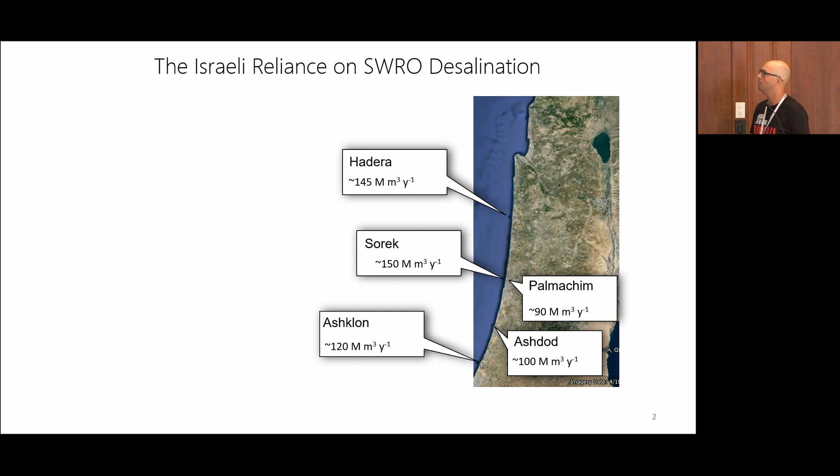I would say that facing water scarcity, Israel launched the construction of 5 large-scale desalination facilities about 20 years ago that today produce roughly 650 million cubic meters of fresh water per year. That corresponds roughly to 70% of what all Israelis are drinking. Now, we are in the midst of constructing another 2 large-scale desalination facilities, one in the middle of the country and one in the north, that in the short term will minimize our dependency on natural fresh water.

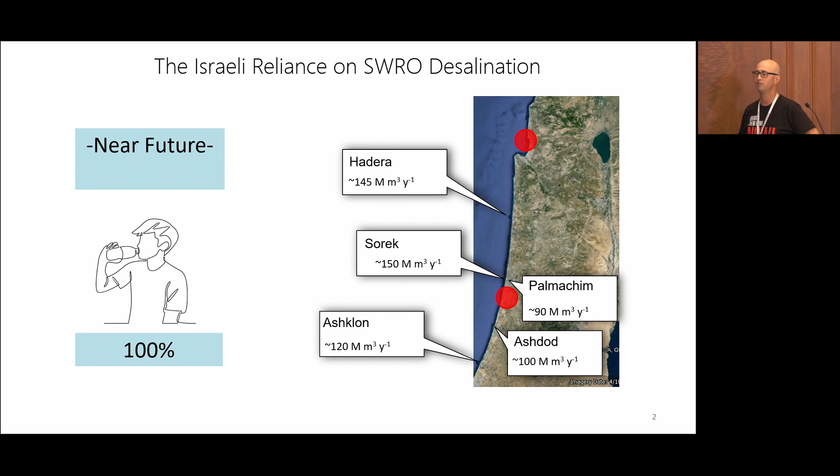Similarly, other countries like Israel have walked the path of this desalination process. However, what is unique and needs to be remembered is that Israel constructed these large-scale facilities over a fairly narrow strip of coastal environment. Now, the scheme of most of the desalination facilities in Israel is similar. You draw water directly from the coast. It is pre-treated and then desalinated, transported to our water carrier, and disseminated to the public after post-treatment.

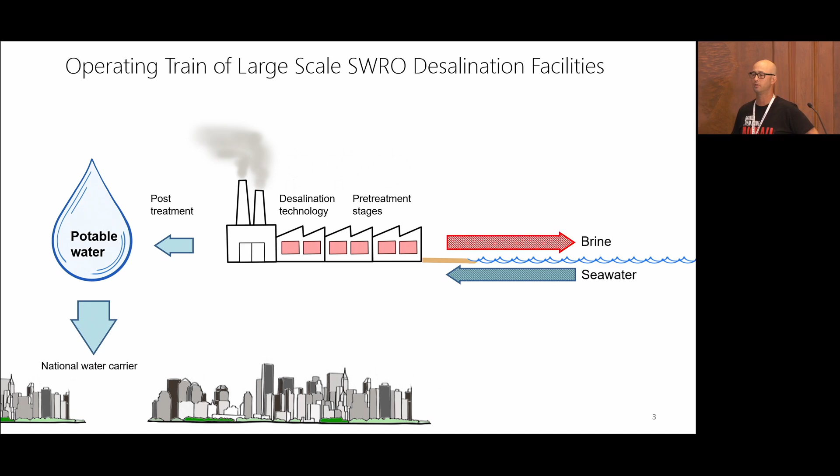However, one should remember that together with desalinating the water, hypersaline brine waste is also discharged back into the coastal environment. As such, this is the nexus that I will be discussing today. In a more poetic way, I would say I see this nexus as the strange case of Dr. Jekyll and Mr. Hyde. Desalination today is one of the most important things for humanity, especially during this era of climate change. However, desalination has a dark side that one should remember, and that's the nexus with the aquatic environment.

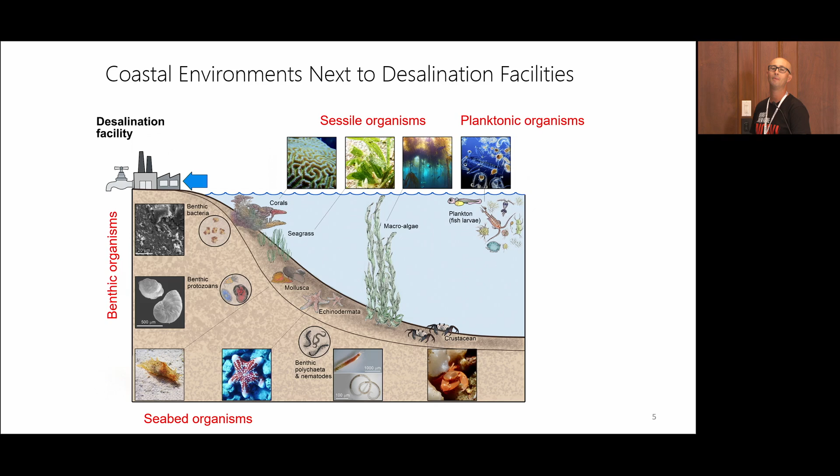Looking at the ocean, this is how I see it. I see planktonic organisms free-floating in the water column. There could be fish larvae, zooplankton, phytoplankton, bacteria, and others. You can also find large macroalgae like kelp, seagrass meadows, and coral reefs. You would also see a lot of organisms roaming the seabed, such as sea snails, sea stars, crustaceans, and many, many others. Under the sediment, you can also find a lot of nematodes and worms, protists, as well as benthic bacteria. All are doing a lot of remineralization and decomposition of organic matter. That's why they are at the basis of the food chain.

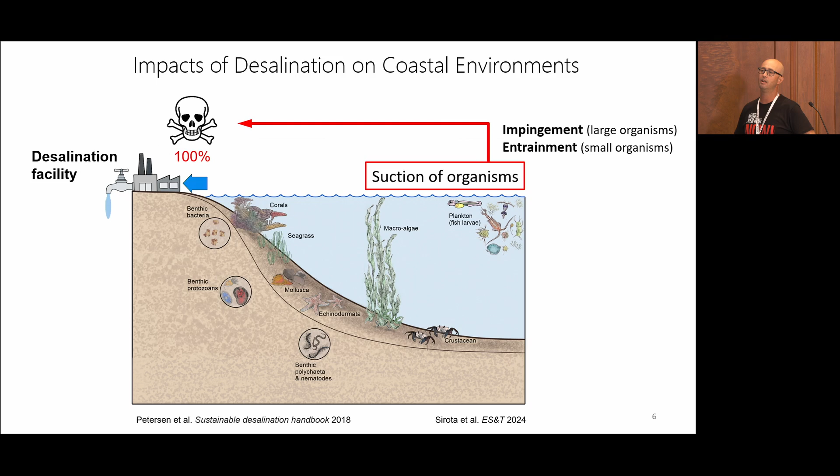The first nexus with the desalination industry is the suction of large and small organisms into the desalination facility. The paradigm is whatever goes in never comes out. However, I will focus in this talk on the impact of brine, this hypersaline solution that is a byproduct of the process. Now, it can be discharged in basically two ways, either directly on the coast, also termed surface discharge, or through pipes to offshore diffuser systems.

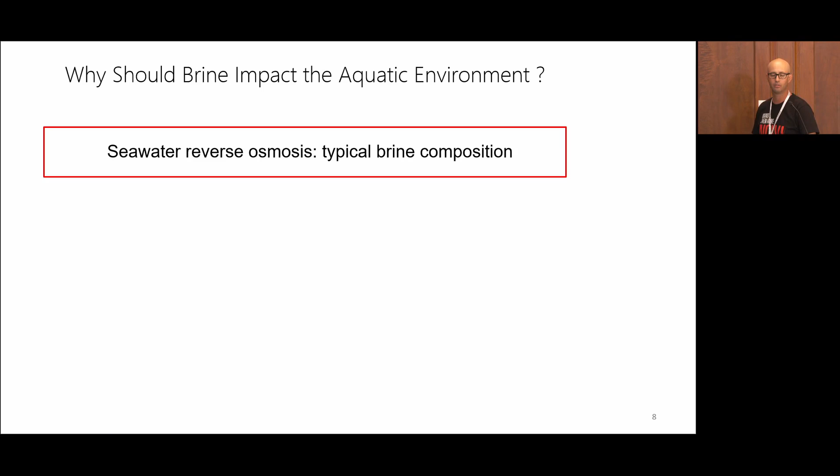Regardless of that, one should ask, why should brine matter? Why should it have an impact? Well, the first thing, obviously, is the hypersaline solution that can cause osmotic stress. When I talk to students about that, just imagine taking a grape and putting it in a salty solution; it will become a raisin. The second thing is chemical additives, such as antiscalants, typically polyphosphonate-based ones. These can cause eutrophication, especially if they are discharged into oligotrophic environments, such as the Mediterranean Sea and the Gulf of Aqaba.

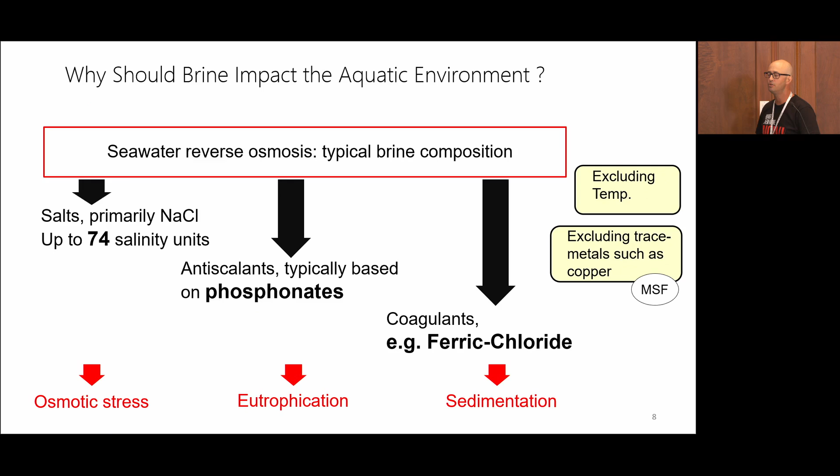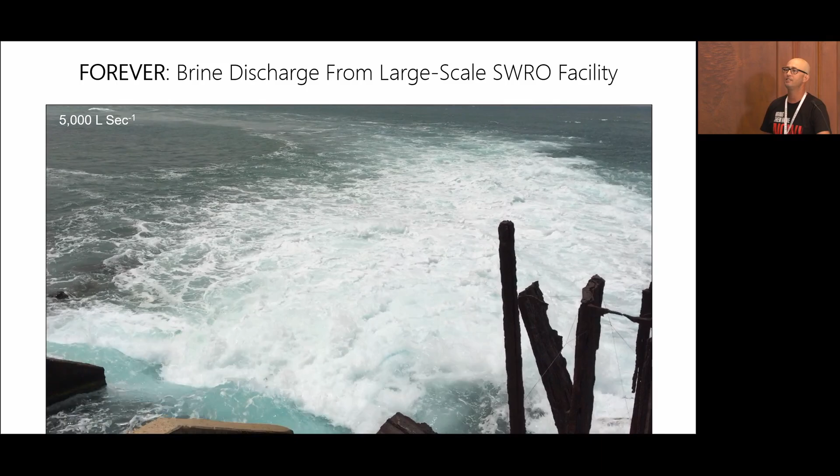Coagulants, such as ferric chloride, can induce sedimentation and therefore change the seabed. I will not talk today about changes in water temperature or traces of metals that are discharged, such as copper, which is usually indicative of multi-stage flashing. If you look at a discharge of this brine, it's not trickling out. This is a river of brine that is being discharged 24/7 forever. This discharge, again, goes directly into the coast.

When you talk to operators and ask, okay, what's your solution? The solution is dilution. What happens is that they take positively buoyant, hot power plant cooling water and mix it together with negatively buoyant brine. Hopefully, it would be neutrally buoyant at roughly 10% salinity above ambient. That should expedite mixing. When we did a huge 3-year survey monitoring the outfalls of the large-scale desalination plants we have in Israel, we saw that the footprint of this plume, whether it's on the surface of the water or creeping over the bottom, is roughly 1 to 3 square kilometers.

Sorry, I don't have it in acres or feet.

But if you look at the diffuser systems, it's way smaller, up to 1 kilometer.

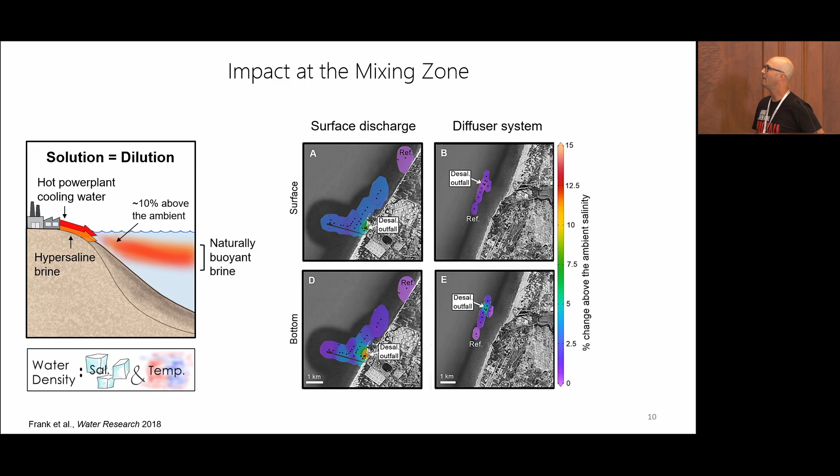One thing you should notice is that it should have been naturally buoyant, but when you actually measure it, it's creeping over the seabed. So the organisms that will be impacted are mostly sessile or under the sediment.

When we looked into it, we were sure we'd find horrific things, but actually what we found is that for benthic organisms, the numbers were higher next to the outfall, which is different from what we thought. We thought they would all be dead. Also, their activity went significantly higher than at the outfall point.

After about one year of research, we found their predators were dying. There were no predators. Mostly foraminifera and nematodes were gone from this entire outfall zone because they could not cope with the hypersaline solution around them. Therefore, bacteria were growing - molecular identification showed that most of them were halophilic, basically salt-loving bacteria.

Overall, the important thing to remember is that the food web changed. Now you can ask, is change good or is change bad? Let's talk about that in the discussion, but there was change.

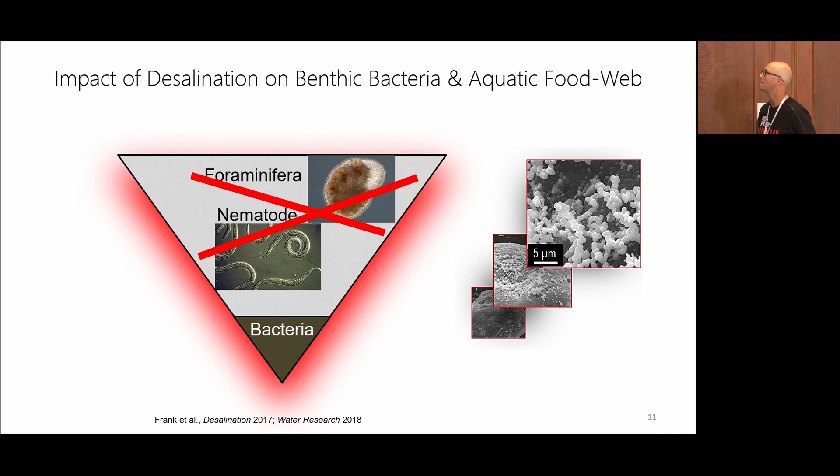Next, we wanted to understand what impact antiscalant type will have on the desalination area and the organisms. Polyphosphonate-based antiscalants, which are commonly used, result in a release of phosphate into the environment - we saw that in a recent paper in ES&T. Polycarboxylate-based antiscalants result in carbon enrichment of the discharge area.

Looking into phytoplankton, those organisms that do photosynthesis and are responsible for primary production - regardless of concentration of the polyphosphonate-based antiscalant, phytoplankton flourished, up to 200% more than the control.

Differently, polycarboxylate-based antiscalant resulted in a linear regression of their growth, probably due to competition for other nutrients such as nitrogen and phosphorus.

Bacteria obviously also need that phosphate, so they grew, because that's a limiting factor in an oligotrophic environment such as the Mediterranean and the Gulf.

It was not surprising that they also enjoyed the carbon released from those polycarboxylated antiscalants, to a point where a different limiting factor occurred, mostly phosphorus.

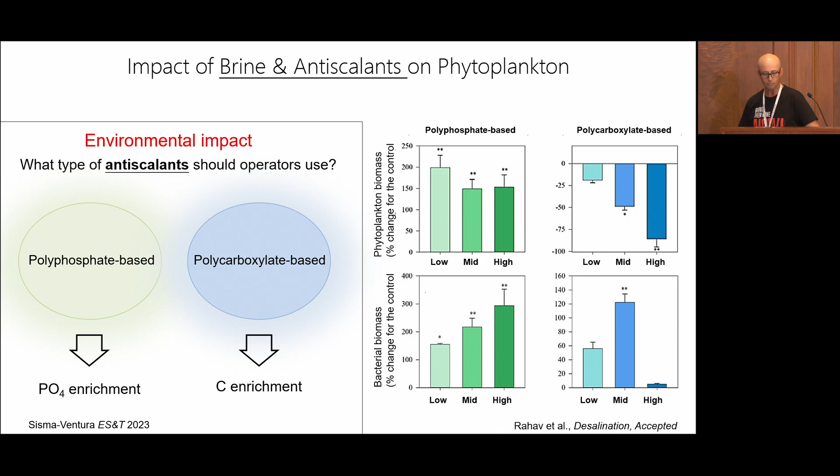Nonetheless, to conclude that part: addition of antiscalants reduces phytoplankton and slightly increases biomass by bacterioplankton. Differently, phosphonates increase both. One should ask himself, even after lunch when everybody is pretty tired, who cares?

We think operators should care, because this discharge zone is very close to the intake as well. So what will happen to feed water quality once you draw it back into the desalination facility? Are you in a kind of negative feedback loop?

My last example for now would be on coral reefs and desalination, and this is quite interesting. Coral reefs are ecologically and economically important - I would say super important - to vast regions across the globe. Their distribution is rather constrained in a narrow geographical belt, and what's interesting is that if you compare this belt to water-scarce areas across the globe, there are a lot of similarities.

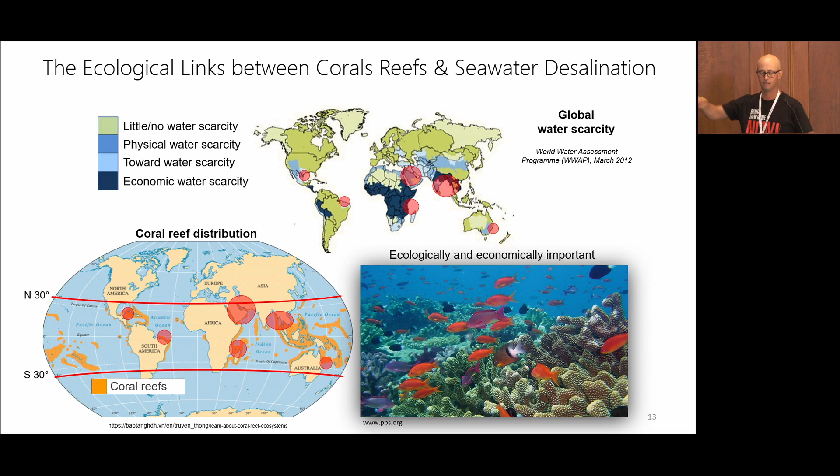Again, unfortunately I don't have time to talk about that, but please ask me during the discussion. Nonetheless, it highlights the nexus of coral reefs and desalination.

Now just a short reminder, because a lot of you are engineers: corals are animals that live in very tight symbiosis with heterotrophic bacteria and algae. They cannot survive without them.

Under control conditions in the Gulf of Aqaba, we saw that the polyps - those tentacles, basically their mouth - were exposed out, and they were filtering food, feeling nice and dandy. However, once brine and chemicals were added, something happened: heterotrophic bacteria left the tissue, and the algae left the tissue. This is causing bleaching, basically the death of the coral.

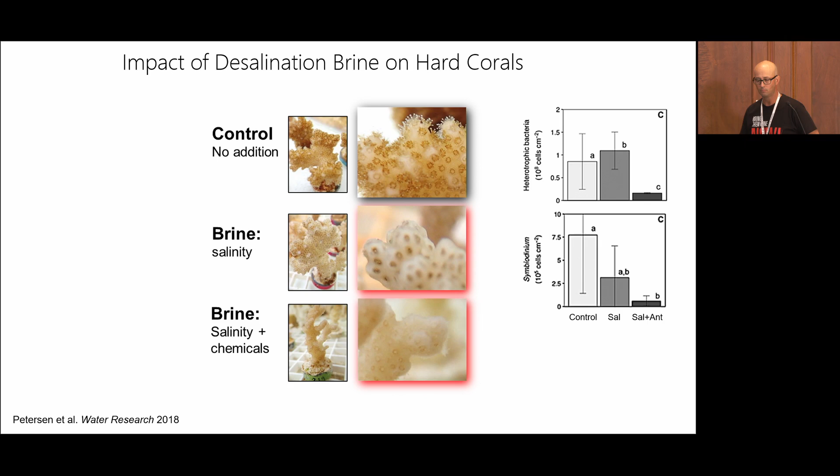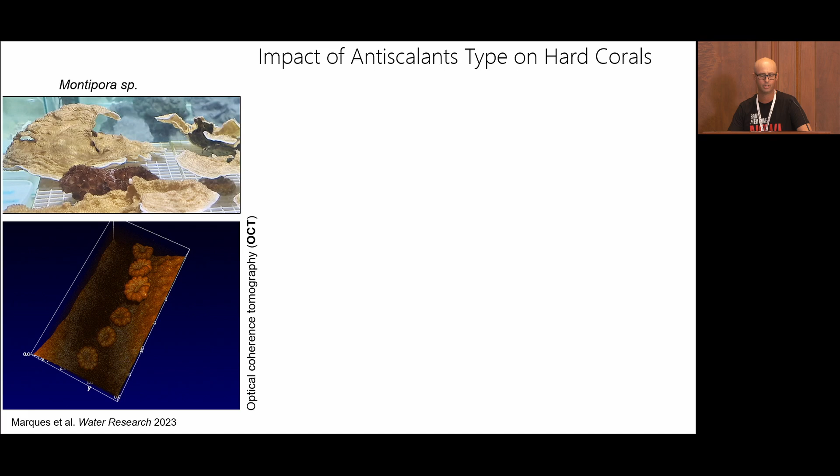Again, we wanted to understand what different types of antiscalants will cause to these corals. So we used a model coral called Montipora, and on the bottom you can see optical coherence tomography images, 3D images of the coral itself - you can see the polyps there.

Again, under bright field microscopy, we can find this golden color coming from the algae, showing that the coral is viable. In white, what you see up here is the tissue in cross-section - if it's white, it means the tissue is thick and viable. You see the polyp out.

However, once polymer-based antiscalants were added, we see white bleached patches. Using the OCT, we saw mucus secretion as well as the skeleton.

However, once we added the polyphosphonates, we saw huge areas of bleached coral - the tissue was gone. Polyps stopped moving - basically the coral was dying.

We state that more research is key towards defining the safe dose, which is site-specific for these different chemicals, as well as understanding the impact of multi-stressors in a climate-changed era.

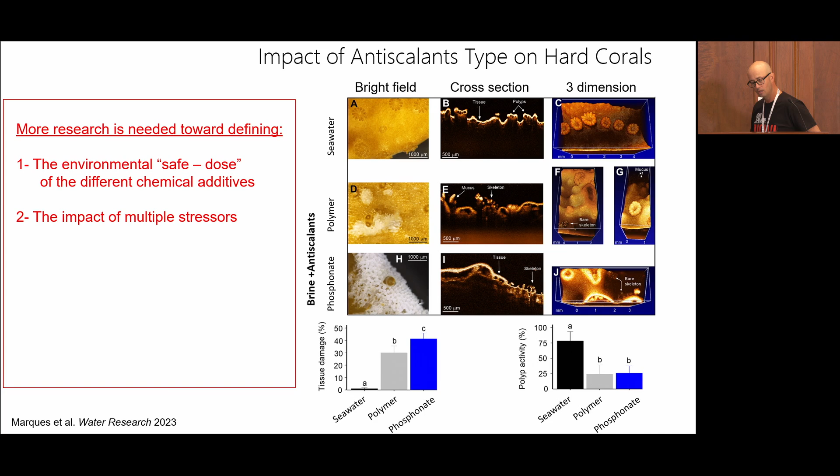I would like to shift gears and highlight that the nexus is bidirectional. It's not just that desalination impacts the environment, the environment also impacts the desalination industry. Low-quality coastal water will cause reduction in pretreatment efficiency and impair the desalination process by causing biofouling.

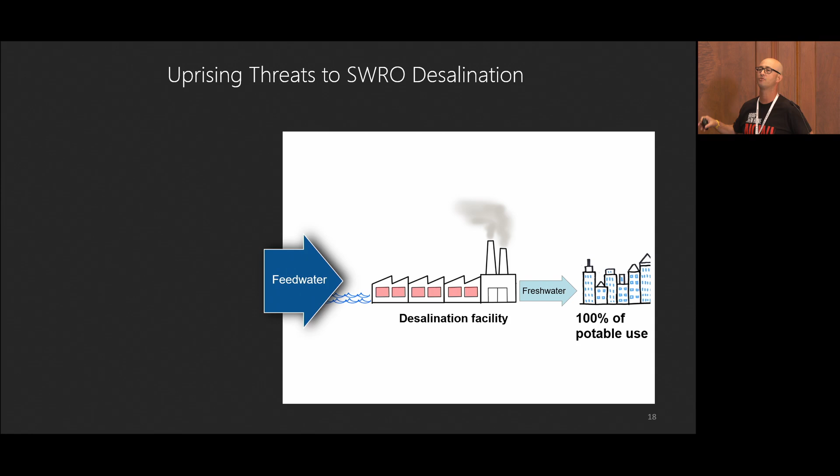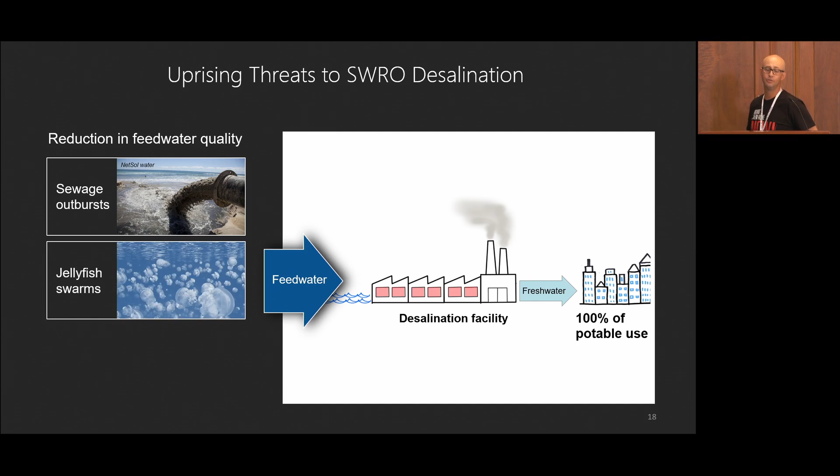We identified 3 key issues threatening the desalination industry these days. One is sewage outburst due to old infrastructure and poor maintenance. The second is increased jellyfish swarms due to climate change. Finally, and this is my biggest concern, which I wish you would convey onward, are oil spills due to increased traffic of tankers. All of these will probably impact freshwater production.

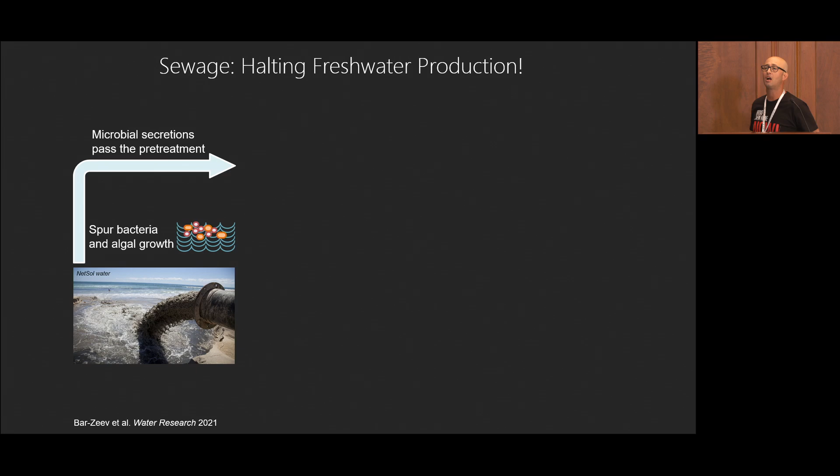If you look at the outburst of sewage, you'll see expedited growth of bacteria and algae because you eutrophy the water. They secrete polysaccharides, both passing through the pretreatment stages. As discussed yesterday, the desalination process is obligated to produce fresh water at a constant rate, otherwise they are penalized. However, once you have fouling due to sewage outburst, you get an increase in transmembranal pressure. Once it's over 10%, it's no longer viable for the desalination industry and they stop production. We saw this happening after 6 to 8 days.

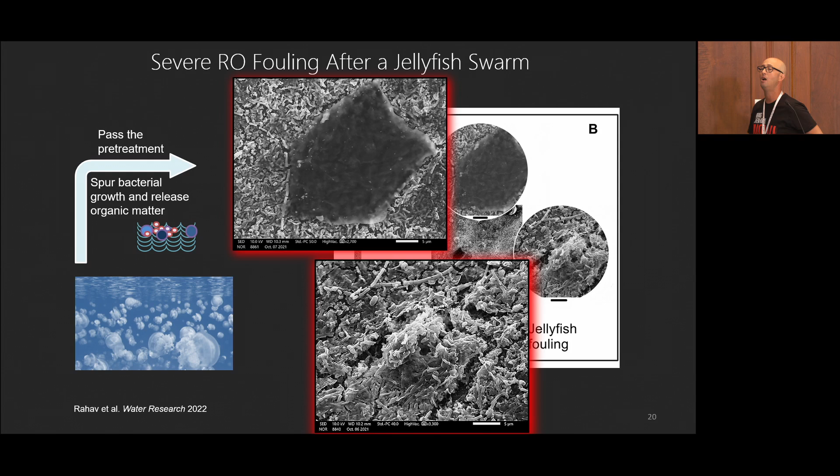Similarly, this happens when jellyfish are sucked into the desalination facility because they are shredded by the revolving drum. This again results in bacterial growth passing through pretreatment with jellyfish parts, ending up in what I call jellyfish fouling. When you look into it, you'll find parts of the jellyfish on the membrane as well as expedited biofouling. We find decreased pretreatment efficiency and dramatic increase in TMP 6 days since the jellyfish were drawn in.

But something else happens as well. Here, unfortunately, I need to go into molecular science a bit. What we find is those epsilon proteobacteria. Again, you should ask yourself, who cares about this molecular stuff? But these epsilon bacteria, Arcobacter, when they form biofouling on the membrane, they secrete toxins - low molecular weight, small charge toxins. Now the question is, when you have a very severe swarm, will that pass into my drinking water? This is something we currently do not know.

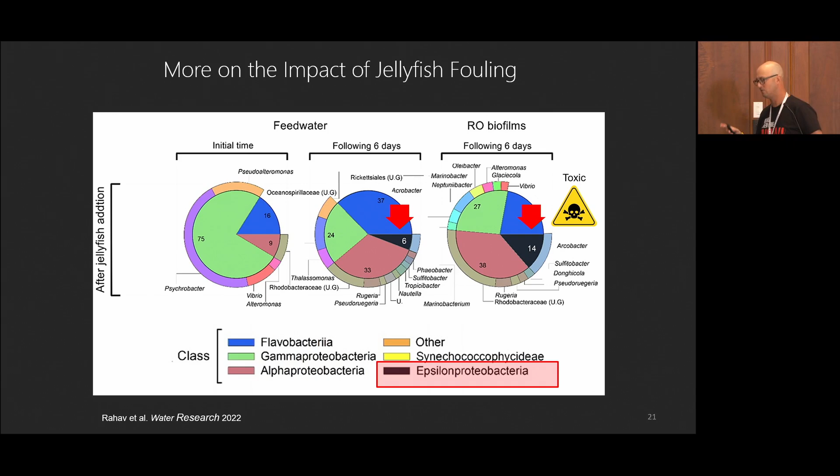My final example will be on oil spills. This is a small one happening about 20 kilometers offshore of Israel, yet it ended up across all of our shores. People ask me after it happened, who cares? Who cares, because oil is highly buoyant and the intake ports are about 5 to 7 meters deep, so why should something end up in our process?

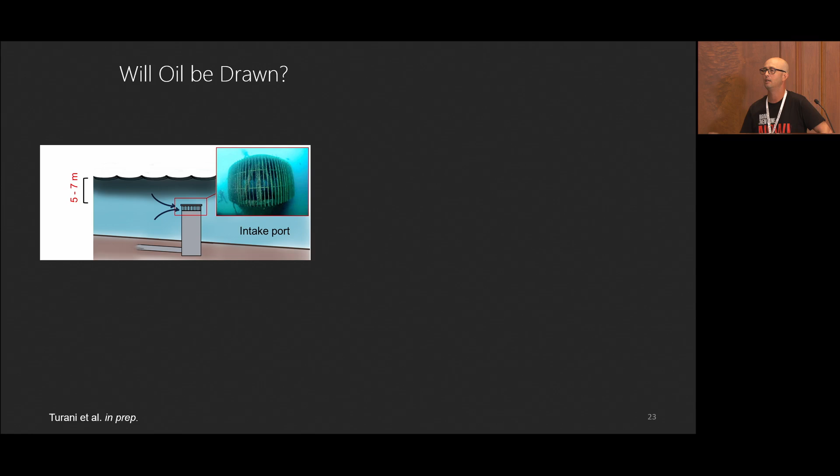Together with Professor Eyal Rahav, we constructed a large-scale desalination pilot in Haifa, where we have a 3 cubic meter feed tank that mimics oil spills, followed by pretreatment similar to Hadera desalination facility and an RO system. The first question was, how much will be drawn in, and if it did, what derivatives are passing through the process? This is an ongoing project, we're in the midst of it. This is after about 6 months of work, so please don't tell anyone about that, although it is online.

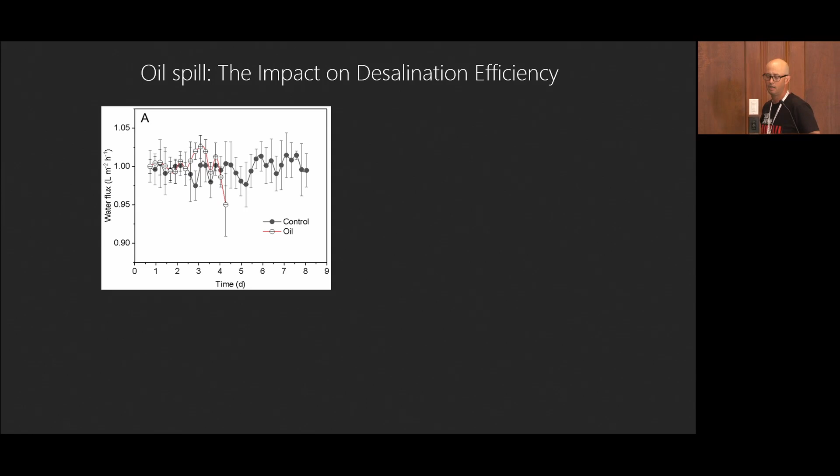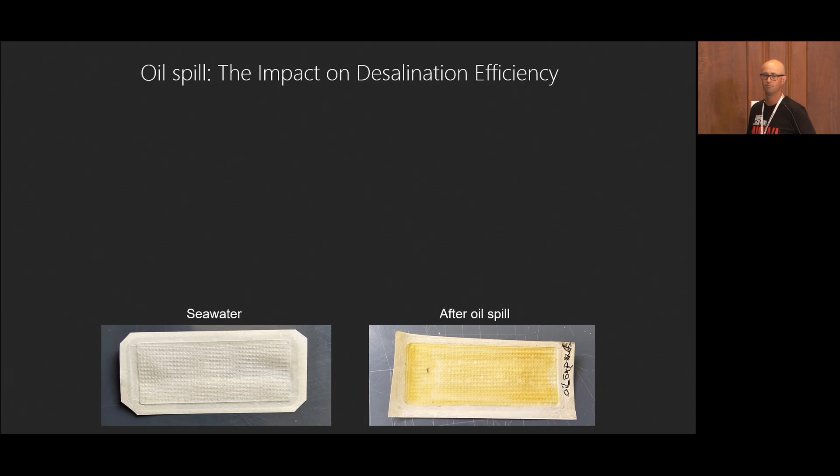After about 4 days, we saw a drop in permeate water flux. Now, this should not happen because we want constant flux. But what happened is that TMP rose to the max operational procedure, about 75 bar. After 4 days, we had to halt the experiment, and this is across 5 experiments that we tested one after the other. Autopsy of the membranes showed that even after coagulation, sedimentation, and micronic filtration, we still had oil derivatives on the membrane. The big question now is, will low molecular weight oil derivatives pass through the membrane and into our drinking water?

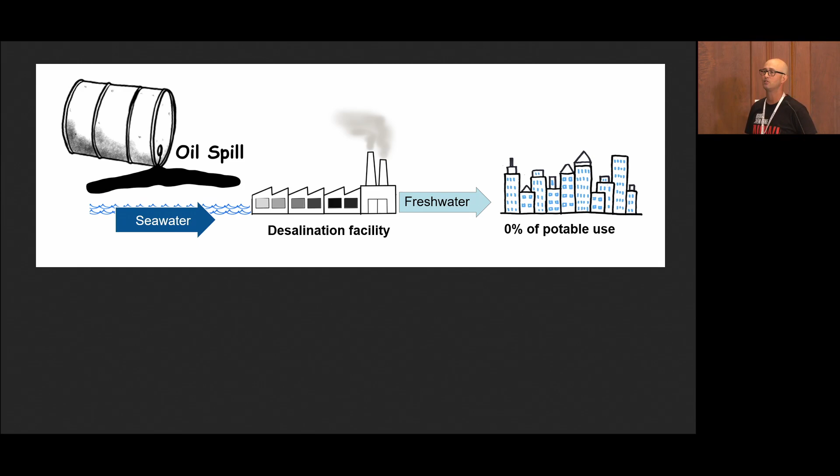Nonetheless, and regardless of what I told you, go to managers of desalination facilities in Israel and ask them what will happen if oil gets into the desalination process. The answer is simple: we have a downtime of 6 months to 1 year, with no freshwater production if that occurs.

These days, at the Zuckerberg Institute, together with Dr. Avner Ronen, we are trying to develop smart pretreatment barriers. If you ask me in the discussion, we can continue to talk about that. But we also try to steal other people's ideas with fancy membranes that we can then clean in harsher conditions.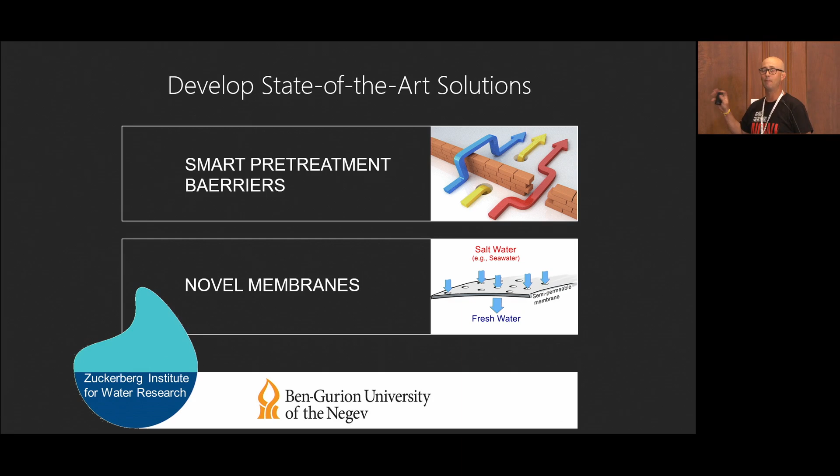I know my slides are black now. I want to move on and give a more positive note, a bird's eye view of how I see these things running, and conclude that Israel is pushing the boundaries of desalination, producing a lot of water through large-scale desalination facilities. But I'm more proud, not of the desalination facilities, but of the fact that we are leaders in desalination innovations. And it's not stopping at freshwater production - we are pushing the boundaries of advanced wastewater treatment, as people talked about today.

I would like to end with a question that a lot of people ask me in presentations: how come Israel, 9 million people, a small nation, has become this water trailblazer? The credit needs to go back to our first prime minister, David Ben-Gurion, and colleagues, when they coined that water is a strategic asset in Israel. This is making Israel, the state, look forward and plan wisely.

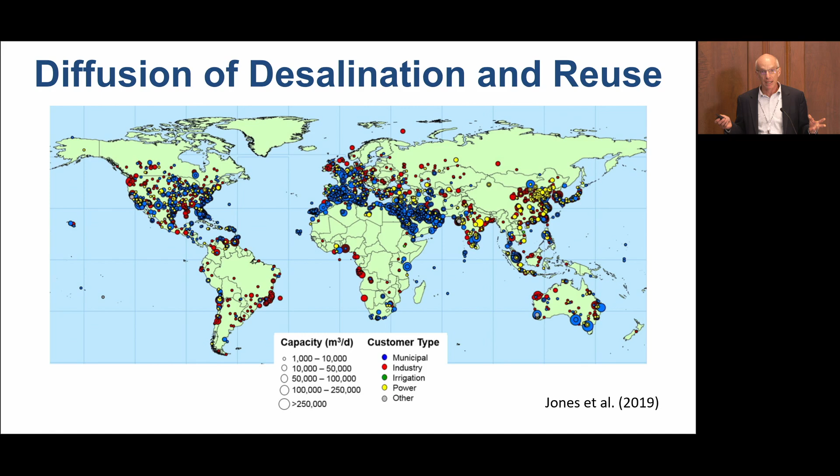But remember, most of the wastewater in the world is not being treated today. And we're about to build lots and lots of wastewater treatment plants to address global sanitation problems. And we're going to see megacities develop, and they're going to need some form of urban drainage and sewage disposal. So I want to tell you a little story about California so you can see how this has played out in the United States.

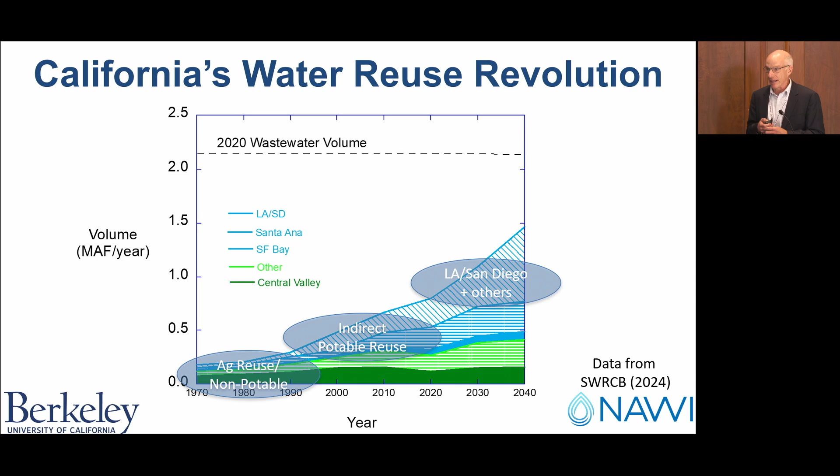And in about 2015, a severe drought led the politicians in Los Angeles and San Diego to commit to essentially following Orange County's lead. And now we're at a point where we're projecting that something like 70% of California's wastewater will be recycled. As you heard earlier today, Orange County doesn't have any more wastewater. They're looking to their neighbors to give them more wastewater that they can recycle. Los Angeles and San Diego hope to be at the same place. So water reuse is essentially done in California, at least the centralized type of water reuse. Let's talk about desalination in California.

So the reason that we chose to go with potable water reuse instead of seawater desalination in California, and I'll assert to you the reason we're likely to continue investing in potable water reuse and unlikely to build more seawater desalination plants in the coming years, is something referred to as legitimization.

So I had a student, Sasha Harris-Lovett. She worked with Christian Binz, and we co-advised her with Christian's supervisor, Bernhard Truffer, and we looked at this concept of legitimization. So when we started looking at this in the early 2000s, we had this period before us where potable water reuse projects had been rejected by the public, in part because of this idea of the yuck factor or toilet to tap.

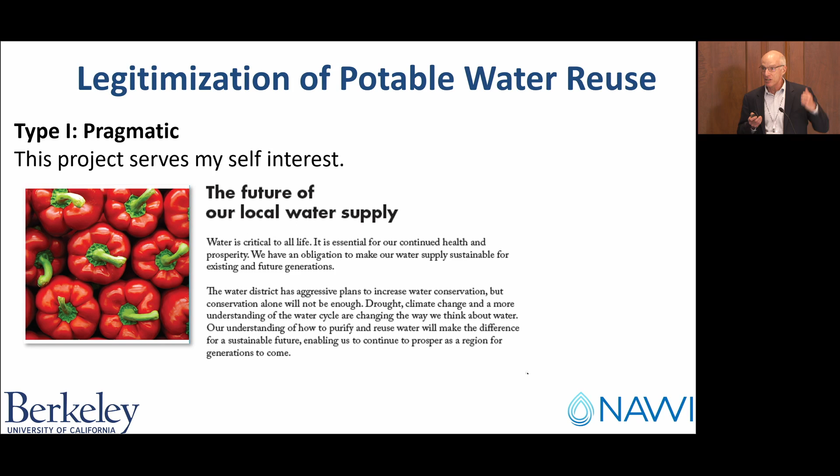You can read about this in our paper on it, but the idea is that the utility talks about the project as serving the public's interest and creating a safe water supply, not as a way of disposing of sewage, not as a way of finding a cheap way to provide water, but as a way of being green and sustainable and resilient in the face of climate change.

The second type of legitimacy that has to occur is moral legitimacy, and that is that the public has to trust the people doing the water reuse. And this involves things like trust in the utility because they're open and transparent about what's going on. They don't try to brush problems underneath the rug, and they trust the regulators to look out for the public's best interest. And Orange County Water District and other utilities and the state regulators did a lot of work to create a system of regulating water reuse that created legitimacy.

And finally, they have type 3 legitimacy, cognitive legitimacy, where people have experience with water reuse. And when they have experience with water reuse, they're familiar with it. They drink the water. So when you go to Orange County and go on the tour of the treatment plant, you get a little bottle at the end and you try it, and it tastes just like any other water. And those three things together created this legitimacy.

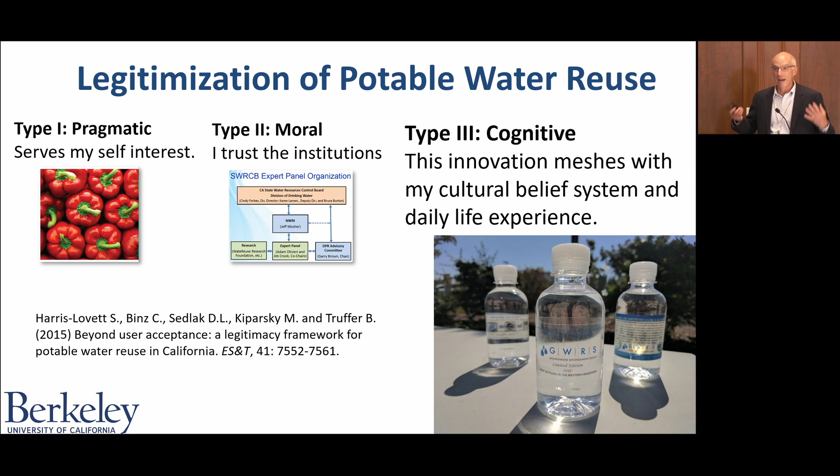And now when a new potable water reuse project is proposed in Southern California, you don't hear anything from the public. You don't have people wanting to reject it. You don't see articles in the newspaper about toilet to tap, and that idea is spreading around the rest of the United States. So when projects are proposed in Colorado and Texas and Arizona and Georgia, they're generally accepted by the public, and you don't see this rejection. So when I hear people say, well, our country or our people would never accept potable water reuse, I think you forget that there's this process of legitimization that has to take place.

That stands in stark contrast to what happened with seawater desalination in California. Christian and his colleagues at Eawag wrote this wonderful paper that came out in 2022 where they traced the discourse about seawater desalination. I don't have the time to get into the issue in a lot of detail right now, but what happened is different groups talked about seawater desalination in different ways.

Some people were proponents, like the company that was trying to promote it, Poseidon. Some people were opponents, like the people who were investing in potable water reuse, and other people just questioned the impacts, like we just heard about in the previous talks, of desalination on the ocean environment. And so it became quite contentious, and the private company, which was responsible for the proposed seawater desalination plant, became a little bit of a villain in the eyes of the public.

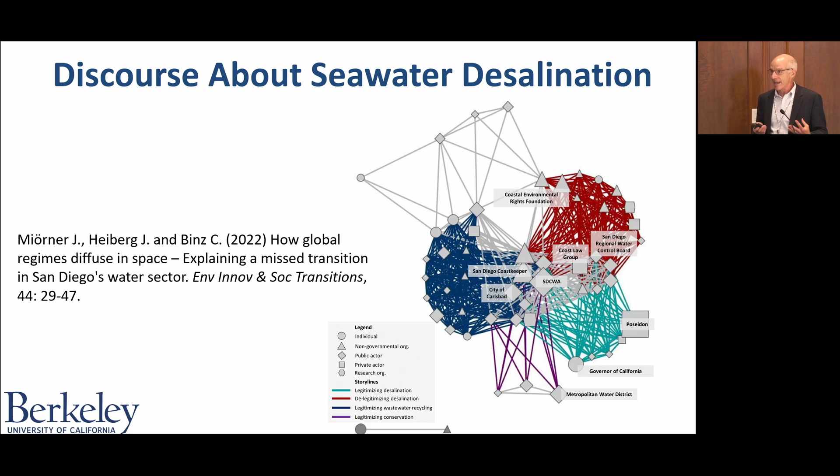And so when that happened, people became very suspicious of the profit motive behind a private company trying to build a public-private partnership for water. And it went against the way in which legitimization tends to happen with water in California. And as a result, when we get proposals for large seawater desalination projects in California, there's organized public opposition.

So this project, the Huntington Beach project, which was rejected by the Coastal Commission in 2022, or the approved project in Monterey, which barely squeaked through by a small margin and may or may not end up getting built ultimately, or even the existing Carlsbad project, which still faces public opposition from the environmental community. It really is a different environment when we think about the future of desalination in Southern California.

So that's kind of a little bit of a story about successful legitimization of potable water reuse, kind of unsuccessful legitimization of seawater desalination. Let me tell you where this is going next. So when we think about water reuse, I showed you the story and I showed you this map, and it gave you the idea that potable water reuse had reached the end of the line because we have plans for reusing all the water, but that's not the end of the line.

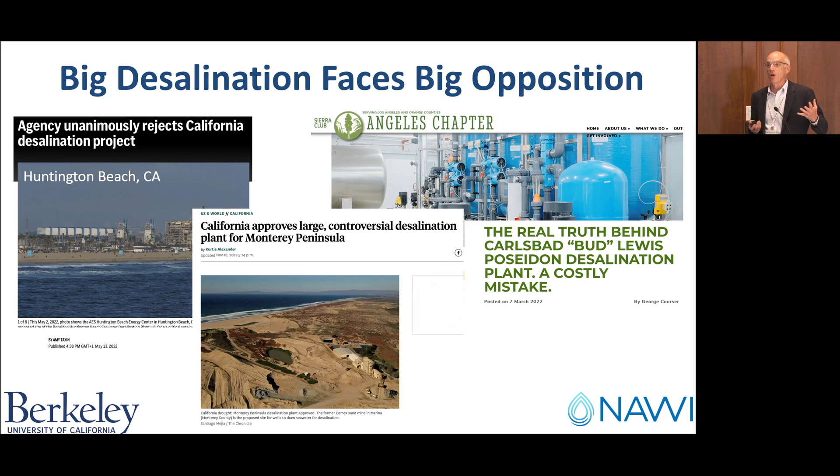As we heard in our keynote on the first day from Megan, there's this idea now that before we send the water to the sewage treatment plant, we can recycle it at the building scale. And the city of San Francisco has a wonderful program where there's an ordinance requiring large buildings being built in the central business district to have membrane bioreactors and different types of treatment plants in the basement to treat that water through advanced treatment and to reuse it within the building for toilet flushing, for cooling towers, for other types of applications. And we've thought about these projects and we're very impressed by some of the technologies, and they really fit into the way that we now approach the world.

But we also realize that there's a chance that it could become a dead end because these systems require dual reticulation plumbing, and there are not a lot of buildings in the world with dual reticulation plumbing. So it would be for new construction only, and we're not building houses and buildings very quickly in California. So I've been thinking much more about this idea of whether we could have building scale water recycling and use the water for potable or near potable purposes.

So in 2022, I was part of a team that did a techno-economic analysis on this idea of building scale water systems where you could essentially be net zero water, and produce all the water you need over the course of the year, maybe with a rainwater tank on the roof, or maybe with a small supplement of water from outside. And what we saw in this analysis is that the water was relatively expensive, between $1.5 and $2.7 per cubic meter. But if you recognize that this is the price the consumer pays and not the water utility, it actually has a return on investment in fewer than 10 years. And so it really becomes attractive to the people who might use it.

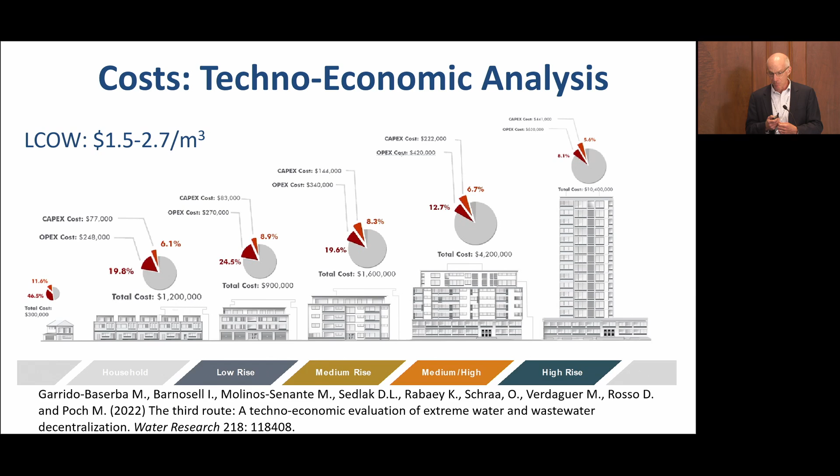And so we could see at current tariff rates in North America and Western Europe, this being quite attractive to utilities. And because the water utility doesn't have to pay for the new infrastructure, it could be a way to meet increasing demand or make up for shortfalls due to climate change. The other thing that's quite interesting about this idea of building scale water reuse is that the public not only accepts it, but may actually become quite enthusiastic about it.

So we have a paper, it just came out, I think, yesterday online in Nature Water, where we looked at something that looked a little like Barcelona's superblocks. And if you know anything about the superblocks in Barcelona, these are housing areas where people live in accord, and they're meant to be greener living and more communitarian living. And what we did was an analysis to see if you could integrate vertical farming and nutrient recovery from the wastewater and grow your own food and sell the food to help offset the price of the water treatment system. And this too has a return on investment of fewer than 10 years and probably engenders a lot of interest and enthusiasm. So there's social, cultural support for new technologies that might let it diffuse. So that's kind of where I think reuse is going in some of the wealthy countries in the world.

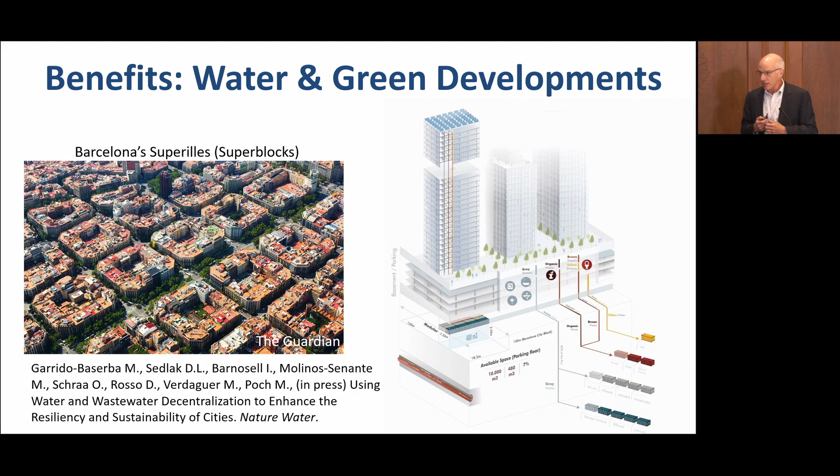I also think desalination has a future. And in California, the future of desalination is probably some smaller seawater desalination plants. I talked with Sharon about this a little on the first day. I hope we talk about it more later. But I think the future in California is going to be more brackish water desalination. But we have a problem. And that problem is what to do with the brines.

Now, this issue of how to get rid of the brine brings me to a project that we started in NAWI when we started thinking about the circular water economy, and that was this question of whether desalination would ever have a role to play in agriculture in trying to address the issue of waterlogging and salinization. We were originally inspired by a group of farmers in the San Joaquin Valley who came together and formed an organization referred to as CV-SALTS. This is a stakeholder-led organization, a consortium between the farmers and the state regulators.

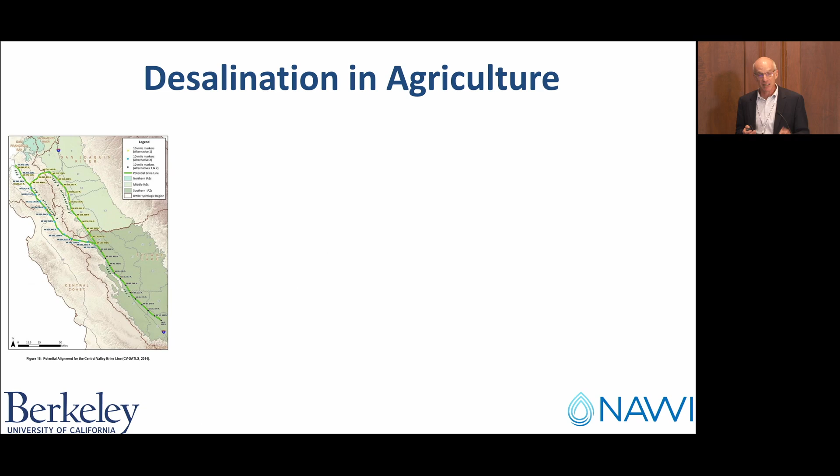And when they thought about the long-term problem of farming in a closed basin where the salts were accumulating, their solution was to build a series of about 30 desalination plants, probably about the size of that project in Carlsbad, and a great big pipeline to take the brine all the way to the San Francisco Bay. It would have cost over about $8 billion, and the water would have been something like $4 a cubic meter. So this project is never going to get built, but the fact that people talk about it makes you realize that it's an existential threat to a large number of people.

And so following up on some research that Megan published in 2017, we started thinking about this idea that there's more granularity to the value of water in California's Central Valley for agriculture, and it has to do with the profits that individual farmers can make by growing high-value crops and the availability of water. And you can already see that in some parts of the valley, farmers are willing to pay about $1,000 an acre foot, or about $1 a cubic meter, for their water. So it gets close to the price of what we could do with brackish water desalination.

And so we've been thinking in our project about small-scale brackish groundwater desalination plants that can be set up close to the farms that have the greatest water need and the highest profitability, to start to build an industry and build expertise in this. And over time it spreads, because this process of learning by doing that social scientists talk about, and the creation of an industry and regulatory structures, makes these things get cheaper over time. So the natural early adopters are the farmers who grow walnuts and almonds and live in places where there's not a lot of water.

But what we found as we've dug into this issue a little deeper, as we've talked to water utility experts and people from the industry, there's a problem. And that is still, you need something to do with the brine. You can't build a giant pipeline if you're going to build a series of small desalination plants, because it would have to be a tiny, tiny pipeline. And the alternative of putting the brine in trucks and driving the trucks to the ocean is also quite expensive and not very acceptable to society.

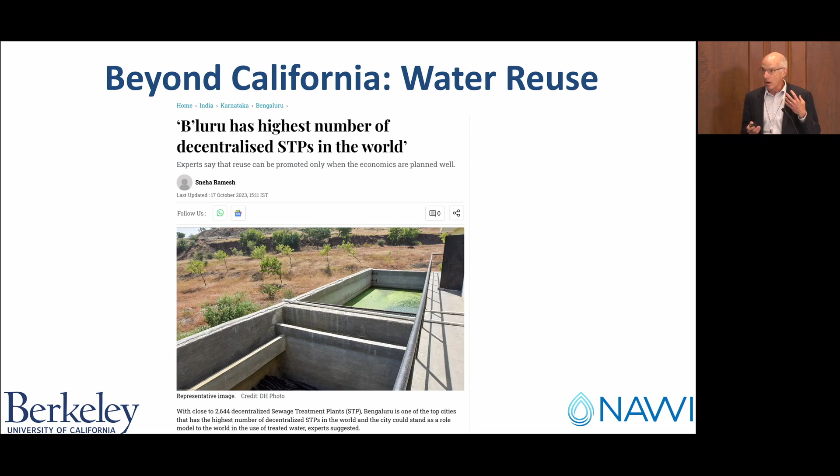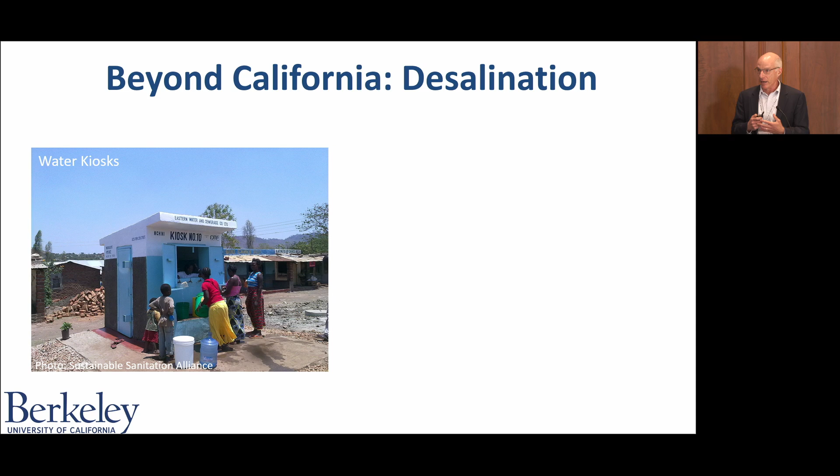One is the issue of water kiosks, for example. In places where people have not realized the human right to safe, affordable water, individual entrepreneurs and NGOs are putting in water kiosks and using desalination technology to turn contaminated groundwater and contaminated surface water into safe drinking water, and they're competing with the Nestles of the world and the trucked water and making their own water. And it's an interesting problem of how to run a freshwater desalination system without an antiscalant, or without highly trained operators present. We should be looking at those kinds of problems and not just focusing solely on this giant mega treatment plant industry that already is doing quite well on its own.

And then finally, I wanted to put a pitch in here for thinking about desalination in agriculture. Last spring, I got to participate in an event at the FAO in Rome, and the FAO is starting to think about this question of desalination in agriculture, and we're already starting to see Spain and Malta and Morocco, many of the countries in the Mediterranean, investing in seawater desalination plants for agriculture, and the kind of knowledge that's been acquired in Israel, the kinds of thinking that we're doing in California. I think it's a really good time for us to think about what we've learned and what the problems might be in the future. So let me end here with giving you some final thoughts and maybe seeding some questions for our discussion.

I think I told you that centralized desalination, the big desalination plants, and centralized water reuse are going to become more accessible to more people facing water security challenges. These become more reliable and cheaper over time as more of them get installed. So that's always going to be there for us. Thinking about the political, economic, social, legal, the PESTLE, right, of issues is important because these play a large role in the diffusion of the technology, and it's on each of us to become educated about more than just our technology if we hope to find the right kind of research to have an impact on the world.

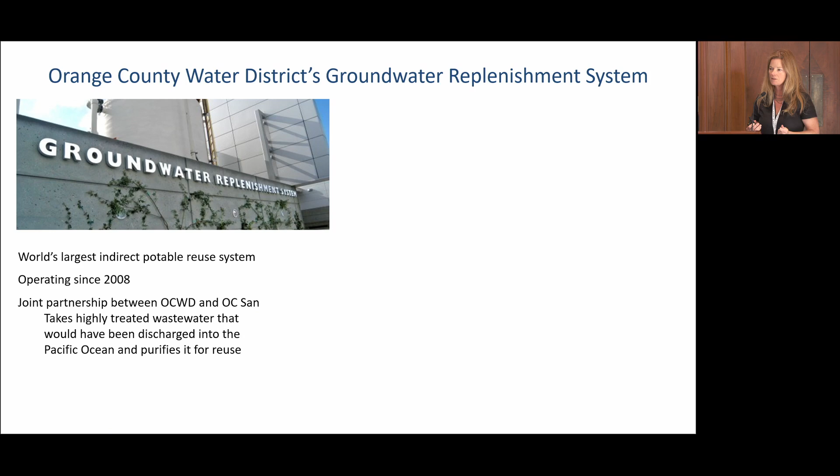Here's the part that maybe you don't know, which is the expansion. OC-SAN was facing the challenge of having to build a second ocean outfall 5 miles off the coast of Huntington Beach. Needing to address 100 MGD of flow relief, it approached OCWD to see if it would be willing to build an expanded project.

Then I show you Point Loma, which is a wastewater treatment plant in San Diego, California. It's been operating since 1963 under constant waivers and renewal of waivers to the Clean Water Act. It's the only facility in the U.S. that discharges primary effluent to the ocean. Environmentalists and surfers did not like that. They were pushing for upgrades, but you could see that upgrades here might not be so easy. Footprint is something I think about a lot in my work, and some of that came from working with Singapore.

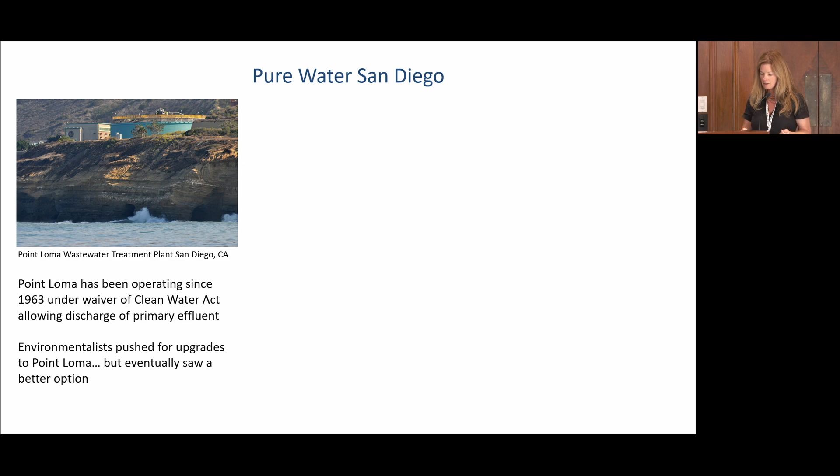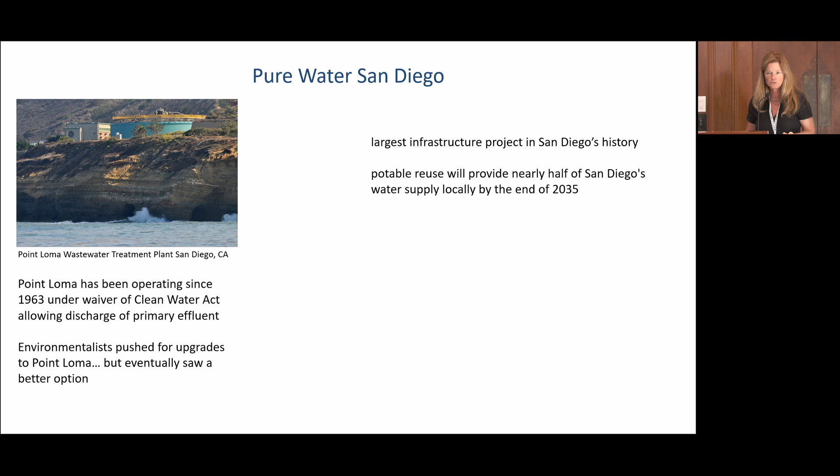But anyway, eventually these environmentalists saw a better option, and ta-da, along came Pure Water San Diego, which is the largest infrastructure project in San Diego's history. Potable reuse—I'm not distinguishing IPR or DPR here—will provide nearly half of San Diego's water supply locally by the end of 2035. So half of a water supply from potable reuse.

This came after years of legal wrangling over sewage. They said, what if instead of trying to clean up the water going into the Pacific, we try to reduce the amount of water being dumped there? So here's the takeaway from those stories: these early large potable reuse projects and expansions have had the primary purpose of reducing discharge or meeting water discharge regulations.

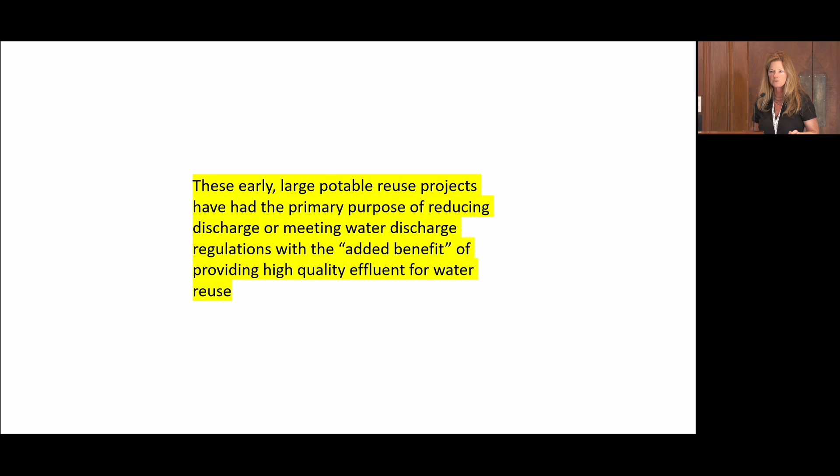Their added benefit is providing high-quality effluent for water reuse. Kind of a different way of looking at it, and David alluded to this earlier.

In our work, we've been looking at the scenario of wastewater effluent coming into a wastewater reclamation facility, going on to an advanced water purification facility, and then being used for potable reuse. Of course, downstream from this, you could also have your drinking water treatment facility.

We get really excited about these facility diagrams. In California, full advanced treatment, which includes RO and AOP, actually does not include microfiltration, but we're going to be including it. It requires reverse osmosis and AOP. That's good—we think of that in terms of public health and CECs, but also because our wastewater has increasing salinity levels.

That's due to consumer devices, industrial inputs, upstream desalination, but also conservation. In low-lying coastal areas like Orange County Water District, it also includes seawater inflow and infiltration. So in low-lying areas with corroded and aging infrastructure, ocean water can intrude into your wastewater reclamation plant.

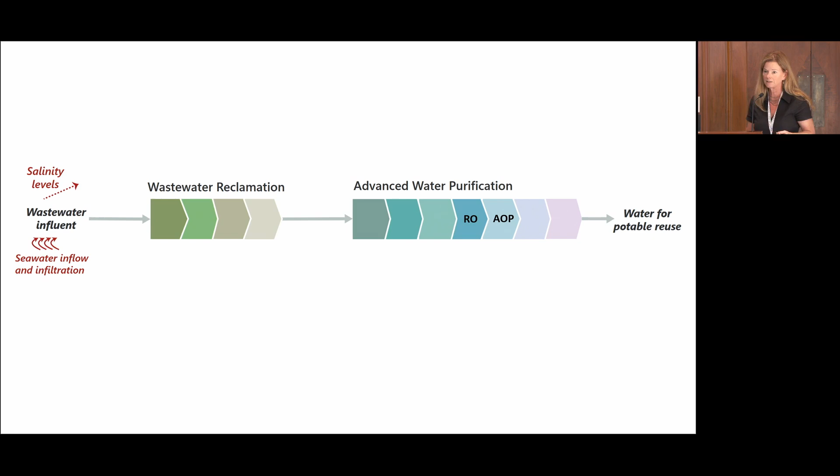This is not limited to Southern California—there's been a lot of studies on it in the Seattle region and other places. But the beauty of using reverse osmosis is that we can use that existing RO to treat the additional salinity. In Orange County's case, they had to throw in a booster pump, but still you can use your existing infrastructure.

So in our second study, we first acknowledged this ability to treat these higher salinities with existing infrastructure. Then we asked: can we take this further? Our question was, can we use the existing RO system to treat even higher salinity—bringing in waste streams that would not normally be treated here—to provide additional supply?

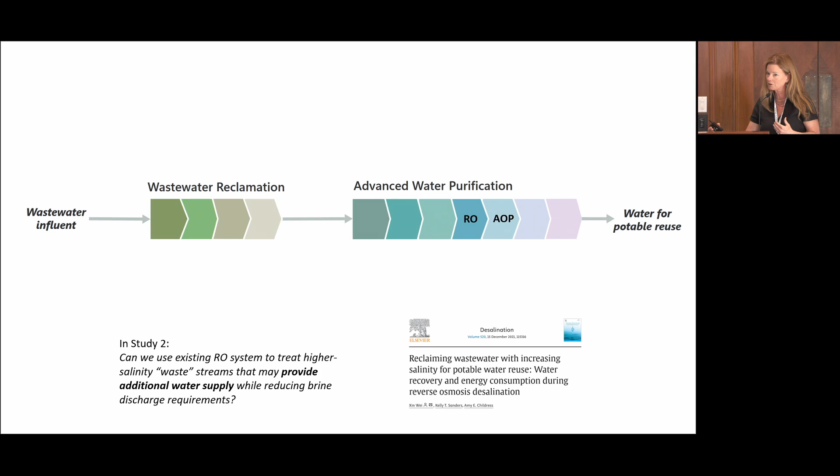This was of interest at Orange County Water District when they were expanding from 100 to 130 MGD, and they had a moment where they were looking for that additional 30 MGD.

So we suggested you could bring in a regional brine interceptor, which consists mostly of brackish water RO brines. We were generalizing—you could bring the brackish water RO brines or the interceptor upstream of the wastewater reclamation facility, depending on how much pretreatment it had and what's in it, or downstream of the facility. We looked at scenarios with and without seawater I&I.

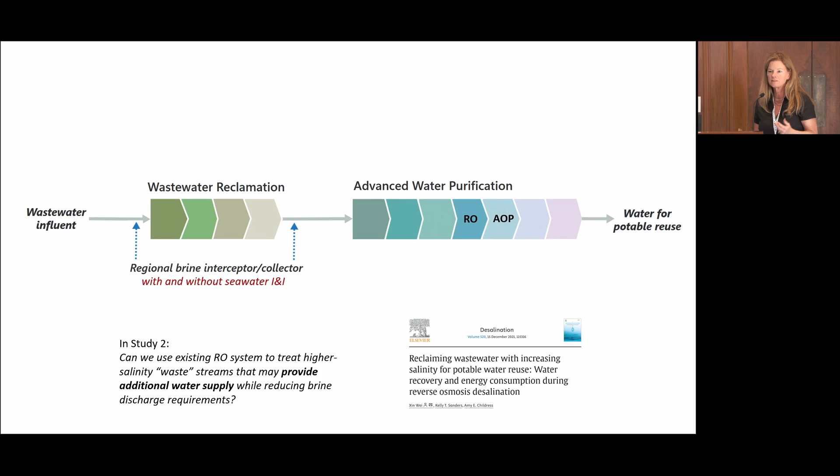After thinking about what we did, we now refer to this seawater I&I as incidental, unplanned, or de facto seawater desalination. See how we did that? We took the potable reuse term 'de facto' and brought it to desalination.

But we said, can we transition from this de facto seawater desalination to doing intentional desalination at this facility? Because there are so many similarities between advanced water purification facilities and seawater RO facilities. So essentially—or not essentially, but simplified—that would just be bringing the seawater in.

We knew this was somewhat possible because of study 3 from earlier on, that we worked with Dudek engineers and the Doheny desalination plant. So I'll show the figure first.

We came up with a schematic for augmenting their ocean water desalination facility—their future ocean water desalination facility—with potable reuse, and we looked at that in terms of cost and environmental impacts. So if CapEx and OpEx is your thing, this paper has tables of dollar signs.

What I'm showing here is first the 5 MGD seawater RO facility that they are currently designing. This scenario was that they're already thinking about upgrading that to a 10 MGD facility. And where we came in was we said, well, why not do potable reuse?

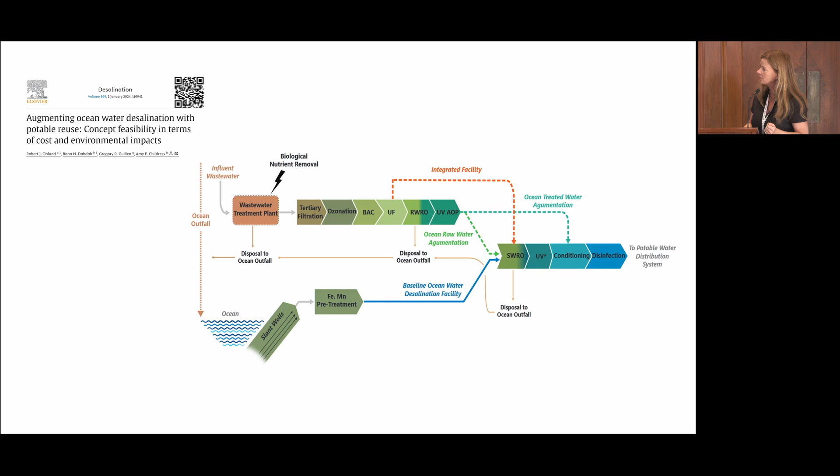Really, when we came at this, we were thinking in terms of the integrated facility, but we backed off and looked at the advantages and disadvantages of different ways of combining these two facilities. So the takeaways were—and again these takeaways are compared with expanding the 5 MGD seawater RO facility to 10 MGD. I knew I was going to do that at some point.

We're making maximum use of the wastewater resource to augment our potable water supply, with no more sending that wastewater out to the ocean. This reduces environmental and construction impacts, with a competitive cost of water production. A key thing we found is that we could have the benefits of augmenting at essentially the same cost.

That's the background for our current study, conceptualization of seawater augmented potable reuse, where we're asking how and where we can integrate seawater into existing AWPF infrastructure and process streams. This is where we'd been wanting to go because, as discussed, in California we have a lot of potable reuse and existing facilities. We thought, wouldn't it be great if you could use those facilities to treat seawater as needed, and then you don't risk having a stranded asset of a seawater RO facility.

We did the pit stop with Doheny because Doheny had, over a decade, gotten all the permits and everything in line to have a seawater RO plant. Over that same decade, as potable reuse was developing—that's great—but once they had those permits, they didn't want to switch gears.

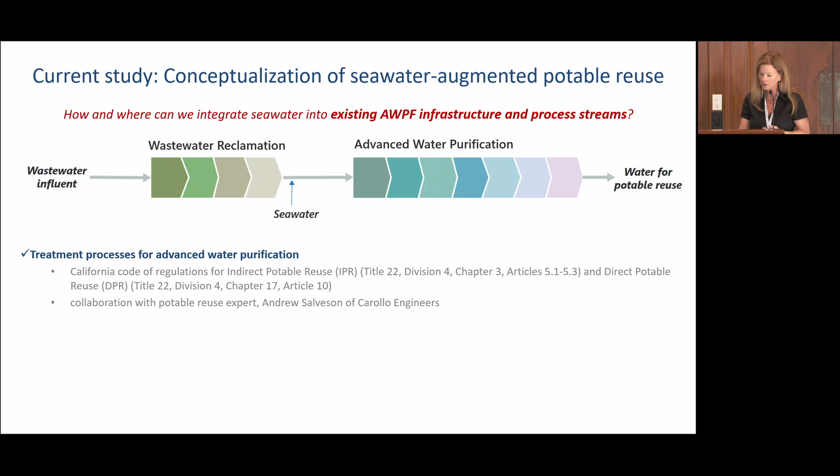For seawater desalination, we really relied on a plant performance and selection guide that came out by the Water Research Foundation, in collaboration with Tom Seacord at Carollo. This was a great guide.

We selected the seawater augmentation locations, where we're bringing the seawater in, with two objectives: one was to use the existing AWPF processes to the fullest extent possible without sacrificing the treatment of wastewater or potable water production, and to implement as few additional processes as possible.

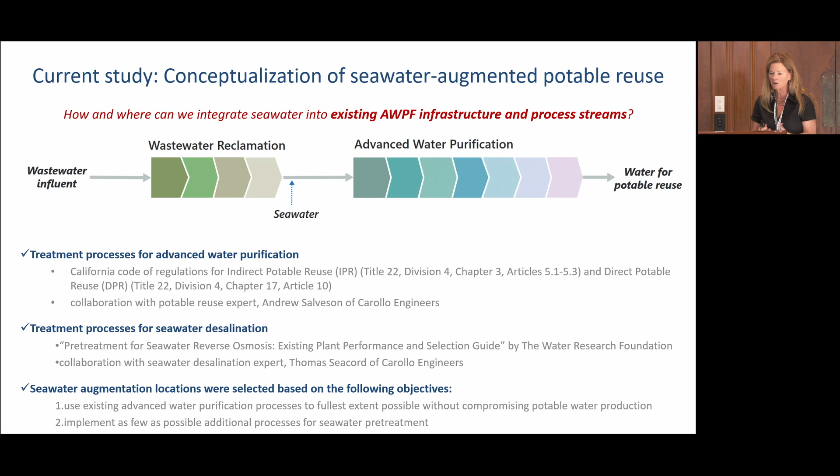This is a first cut. We might go back and ask, why are we trying to implement as few additional processes as possible? We were just basically trying to make it more palatable.

So this was our IPR treatment train: wastewater reclamation with activated sludge, then advanced water purification. You'll see that before every MF or UF step we've got microscreens, and before every RO we have cartridge filtration—just keep that in mind.

We looked at different seawater qualities. As Ido pointed out earlier, oil makes a difference, and we know algal blooms make a difference. First we considered an open ocean intake with seawater under normal conditions, and we simply brought that into the microscreens right upstream of microfiltration. We added additional screens, but kept this the simplest scenario.

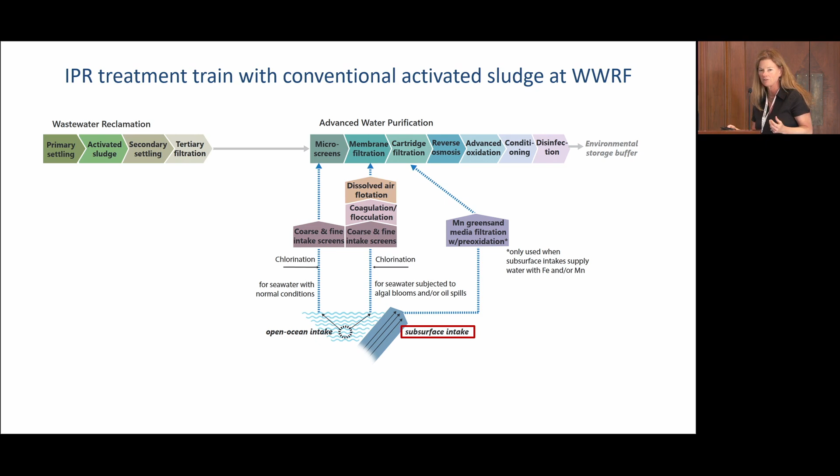We also considered a subsurface intake scenario—where would you bring that in? Of course, you're making use of the subsurface filtration, so we show that coming in right upstream of the reverse osmosis. If you do have iron and manganese in that subsurface, which was a problem we learned about in the Doheny study—an expensive problem—it makes us think a subsurface intake isn't always so great if you have to add on a pretty significant pretreatment step here.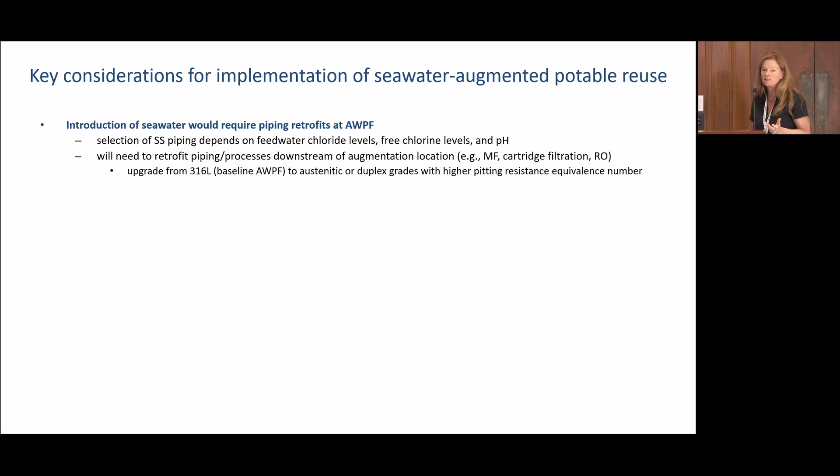So key considerations for implementation of seawater augmented potable reuse. One thing we didn't think about coming straight into it is that the introduction of seawater would require piping retrofits. Piping, we don't talk about that. We're process people. But basically, stainless steel piping and your selection of it depends on feedwater chloride levels, chlorine levels, and pH. So what we found is that we would need to retrofit the piping and the processes downstream of our augmentation location, and particularly depending on how much seawater we were augmenting. And so that's a consideration now you're moving from 316 to super duplex, perhaps.

The RO process at the AWPF, which is our current area of work, must have sufficient flexibility so we could look at different salinities and varying flows, because that was a key new part of this study: we wanted to look at different flow rates coming through the plant, not just different water qualities. So you could do this with a conventional multi-stage RO system with an additional booster pump. We used CCRO. It's easier to model.

And last, the biological processes. This is kind of where we're going next. We start as good academics with a literature review, and then we plan to move to BioWin and then to pilot testing. But from the literature review, we know that water salinity can affect nitrification and denitrification, that microbial acclimation is required, so we need to add things slowly and allow acclimation time. And we also found out that if we keep to less than 10 grams per liter, probably the microorganisms can acclimate in several weeks. So that's promising, because what you'll see is we're under 10 grams per liter.

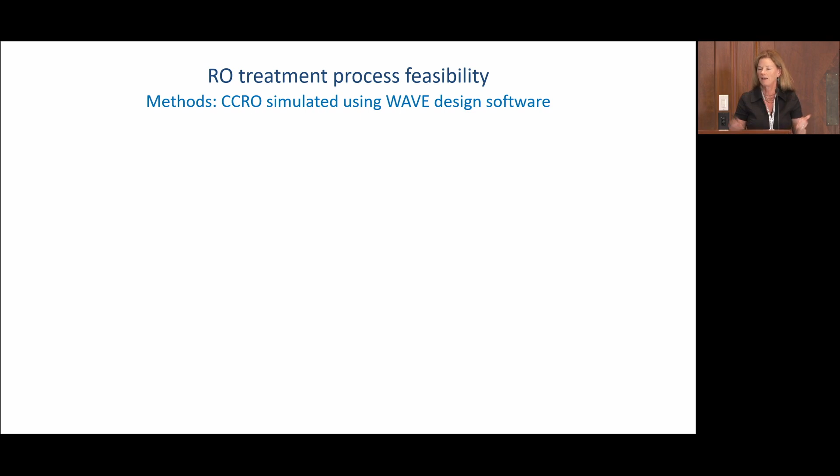So next, I'm going to show you results for the RO treatment process feasibility. These are just through simulations using WAVE design, and these are just first cut. So don't hold me to them when we publish. And as I mentioned earlier, we used CCRO because of the flexibility. You can uncouple recovery, cross-flow velocity, and permeate flux and get the flexibility needed.

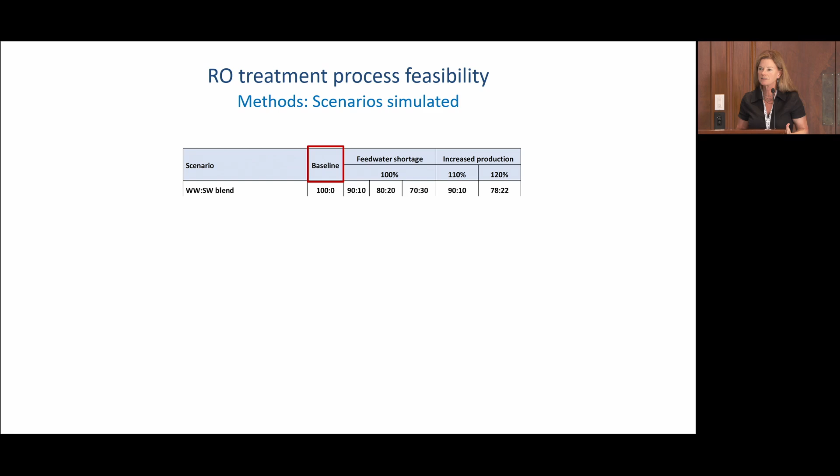Okay, so we set up to look at this using several scenarios. The first was just a baseline scenario, that's just 100% wastewater. Then a feedwater shortage scenario where we looked at augmenting with 10%, 20%, and then 30% seawater. And that was to mimic an AWPF that was experiencing a shortage of treated wastewater.

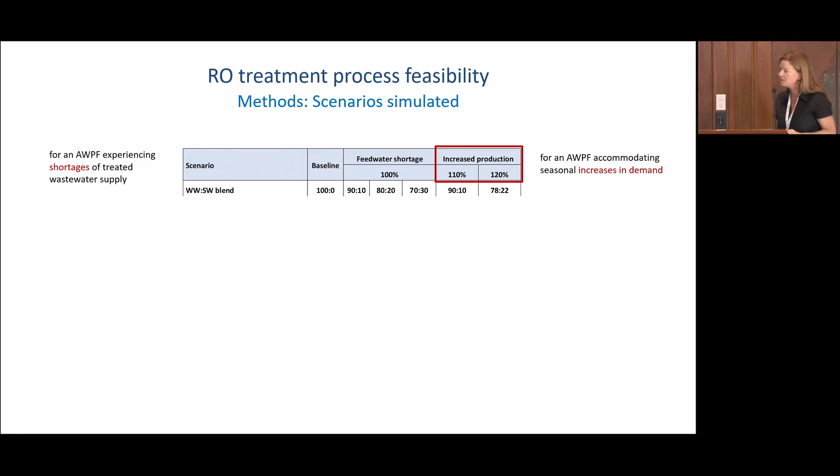And then an increased production. So that was for an AWPF that had additional supply available and had that demand. You need the supply and the demand there. So we looked at 1 MGD for all scenarios, 1.1 and 1.2 for the increased production scenarios. And here I just show you feed TDS and how it increases with augmentation.

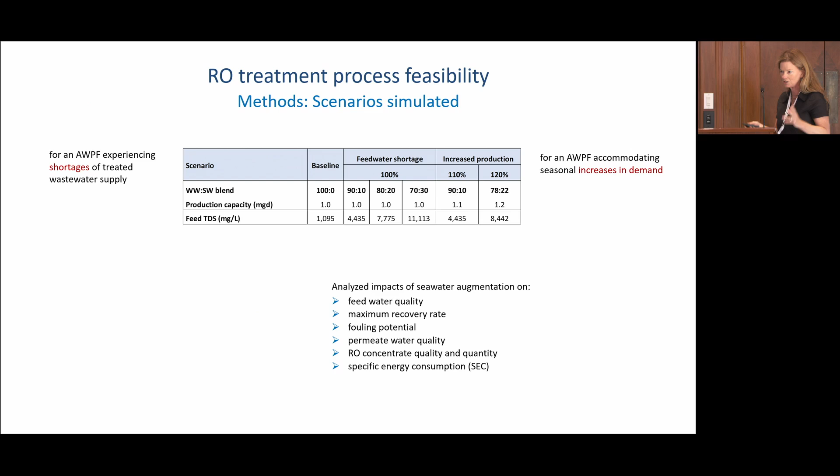We analyzed the seawater augmentation in terms of the feed water quality, maximum recovery rate, fouling potential, permeate water quality, RO concentrate quality and quantity, and specific energy consumption. Again, these are just all output from WAVE software. So here we looked at the feed water quality and maximum recovery rates. And we see, as I mentioned before, TDS increases as you would expect with seawater augmentation. And we were looking at where that came from.

We also looked at the maximum recovery rate at feed water pressure limits, recognizing that the membrane elements we were using had a maximum of 41 bar. And so we can see that the feed water pressure limits determined our maximum recovery for higher augmentation, whereas at lower augmentation, our recovery was determined by feed water solubility limits.

And we saw our recovery go down to 77%. And if you're in the potable reuse world and you see 77%, you get kind of sad until you think, wait, let's also put this in the context of seawater RO, where recovery is 50%. So in that context, 77%, maybe not so bad.

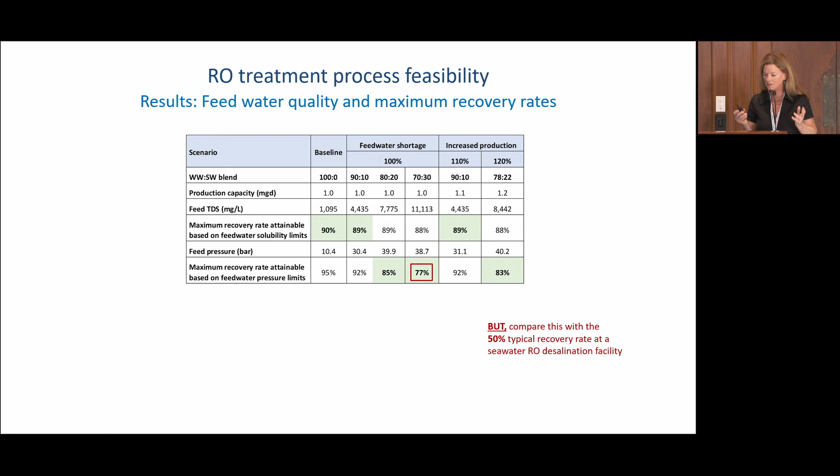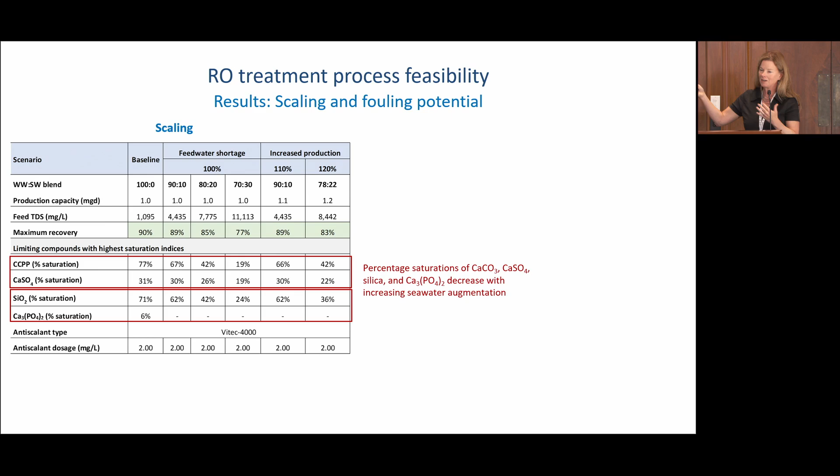Then we looked at scaling. We looked at calcium carbonate, calcium sulfate, silica, calcium phosphate. You might not have expected calcium sulfate and calcium carbonate to decrease as we increase seawater augmentation, but then you have to remember that our recovery was decreasing. So, you know, we always talk about lower recovery, less scaling, but we really saw the benefit here because we thought, oh, we're adding these divalents, scaling's probably going to become an issue, but of course your recovery decreases, so scaling was not an issue, and that's just the recovery.

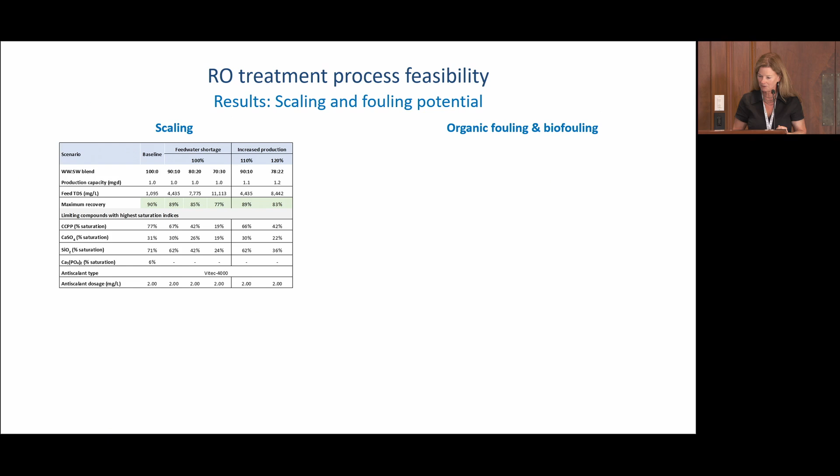So, antiscalant type and dosage were not affected up to 30% seawater augmentation. Sounds trivial, but if you're at a facility and maybe trying to make this conversion and you don't have to change your antiscalant or make more storage area for it, it's a benefit. So that was scaling. If we looked at organic fouling and biofouling, it was a pretty simple story, as you might expect. Just the feed TOC decreases with increasing seawater augmentation. That's a reduced likelihood of fouling and biofouling of membranes.

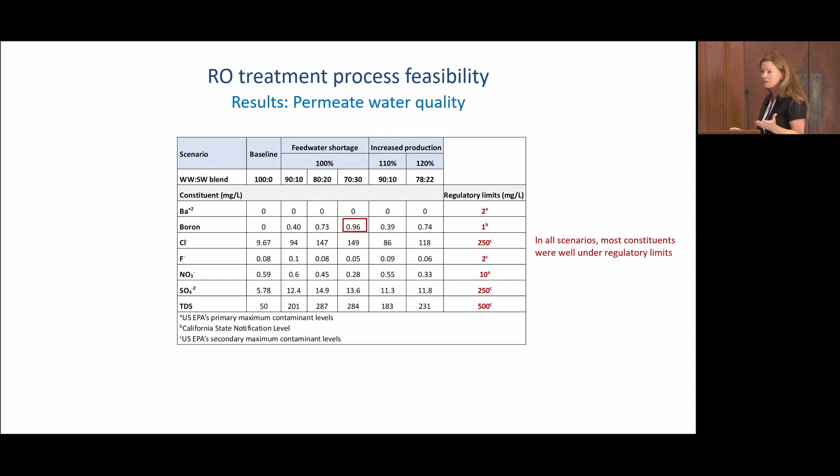Permeate water quality. I am only now seeing the red, so I will wrap it up. In terms of permeate water quality, we looked at what was regulated. We looked at EPA regulations and California state notification levels. In general, we found most constituents were well under regulatory limits, with an exception of boron, so something might need to be done in this case. Of course, that's the highest augmentation case.

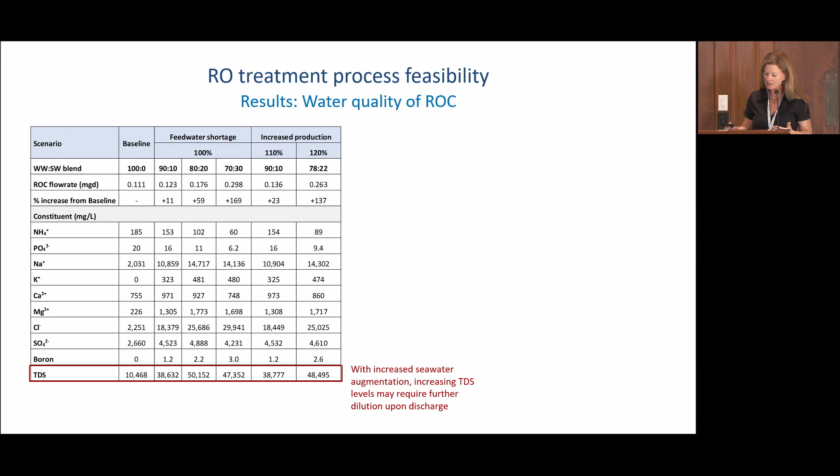And we looked at RO concentrate. Things like lower nutrient levels can be beneficial in RO concentrate discharge, but at the same time our TDS was increasing. But then again, we used this moment to compare to a seawater RO facility and said, okay, we're still within range of what you would get from a typical seawater RO facility for the concentrate. And flow rates increase with increasing seawater augmentation. Again, that's just because recovery is decreasing.

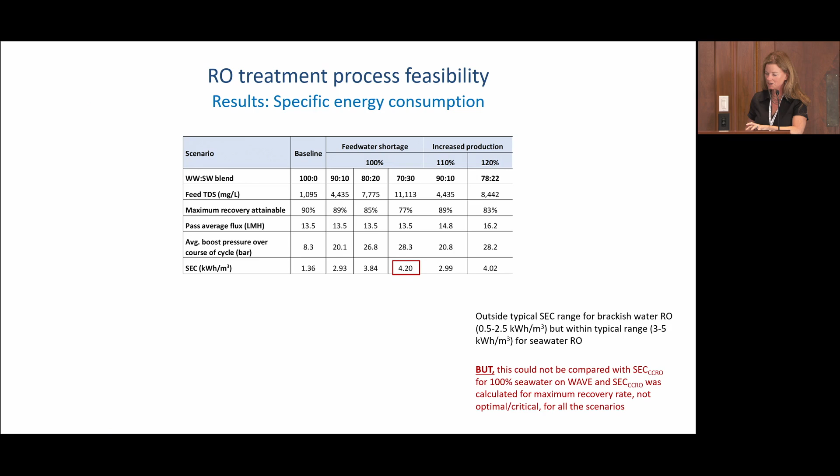And specific energy consumption, yay, that's the end. So we looked at the specific energy consumption. From our baseline of 1.36, we went up to 4.2. So it does increase with increasing seawater augmentation. We have loosely compared these, but realize there's really not so much to compare. So I think the more important thing is for me to get to the takeaways, because I'll come back to the energy.

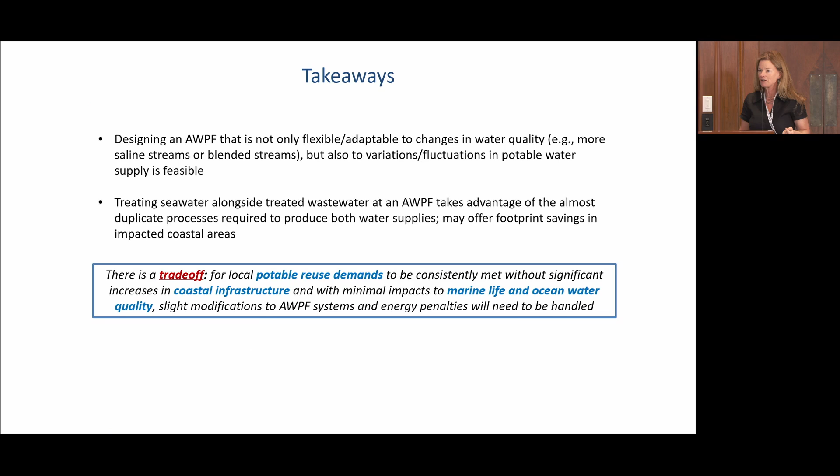But we designed an AWPF that's not only flexible to changes in water quality, but also to variations or fluctuations in potable water supply. Treating seawater alongside treated wastewater takes advantage of the almost duplicate processes required to produce both water supplies, may offer footprint savings in impacted coastal areas, but there is a trade-off for potable reuse demands to be consistently met without significant increases in coastal infrastructure and with minimum impacts to marine life and ocean water quality: slight modifications to the AWPF systems, and energy penalties. Nothing's free, flexibility is not free, and you pay for it with energy.